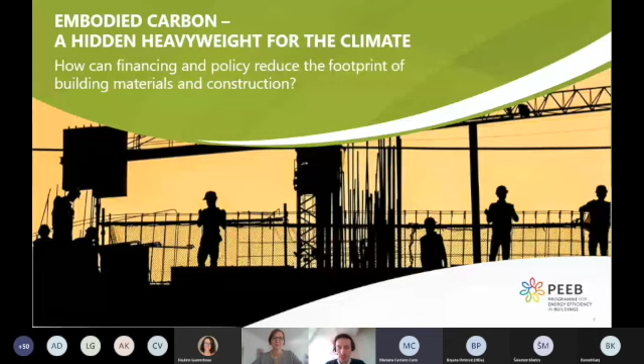This presentation is a summary of our understanding of embodied carbon and how it can be addressed. We will look at it from two angles: first, from a building project angle, what are the strategies to reduce our need for additional resources? And then we will look at the major culprits themselves, meaning building materials.

Just a quick reminder of the scale of the stakes here. As Anna mentioned, the size of Paris is added every week to the global building floor area. This represents a doubling of the global building floor area by 2060. Most of this growth is happening in Africa, China, and India.

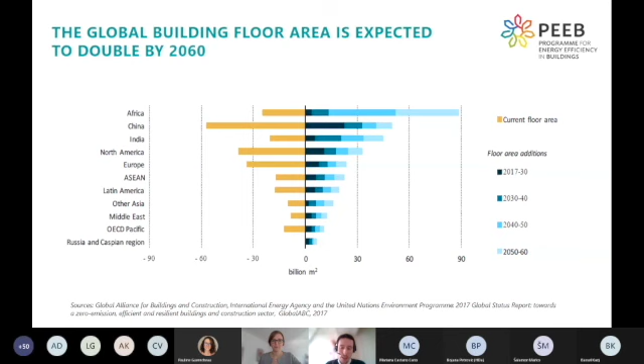Currently, buildings and construction represent 40% of global energy-related greenhouse gas emissions, of which roughly a quarter is so-called embodied carbon. Embodied carbon is essentially the emissions that were released before we even made use of a building. They mostly come from the provision of building materials and from construction activities, and they represent about 10% of global energy-related greenhouse gas emissions.

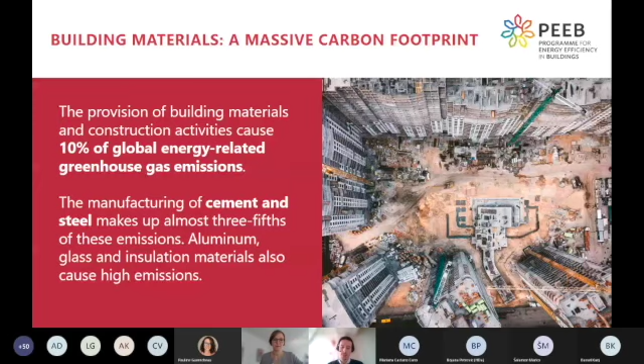The lion's share of these emissions come from the manufacturing of cement and steel, which are very energy-intensive processes, and to a lesser extent from aluminium and glass, which are less used but still very high emitters. Another important fact is that the relative weight of embodied carbon will increase as our buildings become more energy efficient. This means that if we want to keep decarbonizing the building sector, we have to look at embodied carbon just as much as we currently look at energy efficiency.

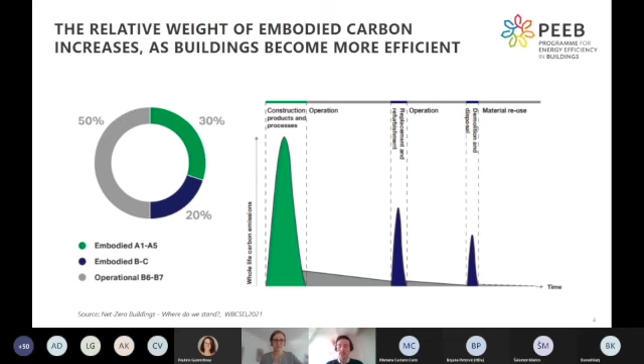Another important thing to notice on this diagram is how concentrated in time embodied carbon is added to the total carbon footprint of a building. This means we have to rethink the way we make our buildings, because there's no way to remove or reduce embodied emissions once they have occurred. So we have to keep them in mind from the earliest decision stages onwards, because afterwards the potential for limiting them reduces rapidly.

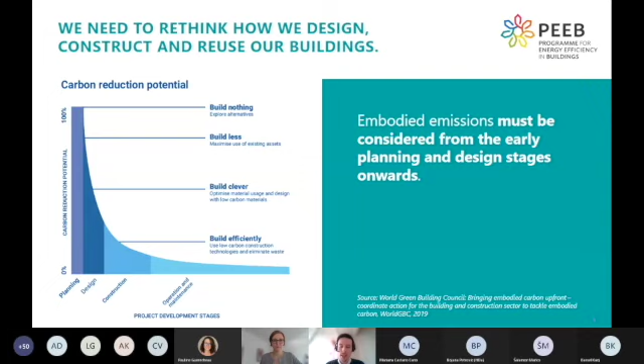So the first stage that is important is the planning stage. It's often overlooked, but it is important because this is when we decide how much and where we want to build, and this can have massive consequences on the amount of resources we need.

Simple decisions can be to favor retrofitting existing assets over constructing new ones. This is exemplified by this beautiful former water tower that was turned into a student house in Denmark. What can also be done is to go for more compact urban spaces, to densify and favor mixed-use planning in order to decrease our need for additional transport infrastructure.

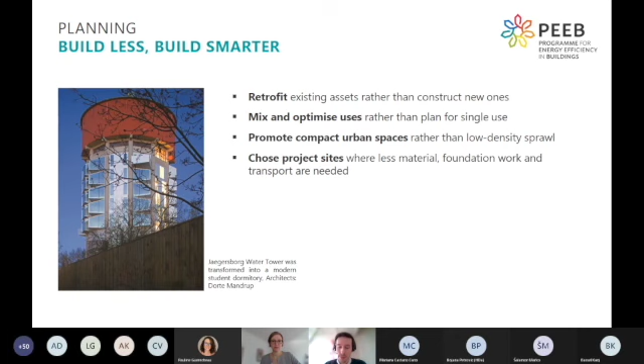A central stage is, of course, the design phase, because the choices we make in terms of architectural shape and materials will have a massive impact, not only on embodied carbon, but also on operational carbon, thermal performance, climate resilience, and adaptability. The decisions made at this stage have a massive impact on the behavior and performance of the building over its entire lifetime and its need for additional resources at later stages.

So what we encourage, in order to understand these interdependencies between embodied carbon and operational carbon, is to take, when possible, a whole life cycle approach in order to better inform design choices.

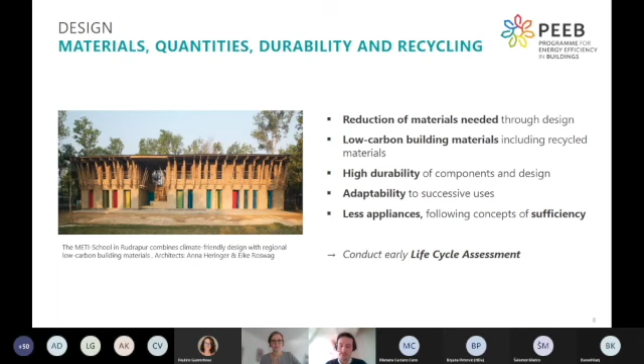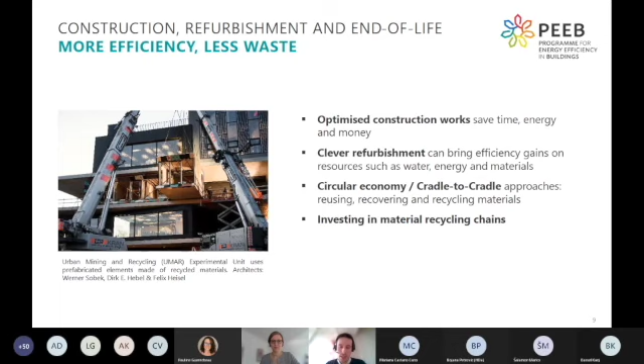Let's look at the elephant in the room: the building materials themselves, because no matter how resource efficient we become, we'll still need a massive amount of materials to address our growing need for buildings.

There are two schools of thought we hear in general: one is more focused on decarbonizing existing industries, and the other is more focused on developing alternatives to conventional building materials. What we understand at PEEB is that it's absolutely essential to do both at the same time, simply because there's no way around using concrete and steel, but there's potential to replace conventional materials in certain situations with more locally relevant and less carbon-intensive alternatives.

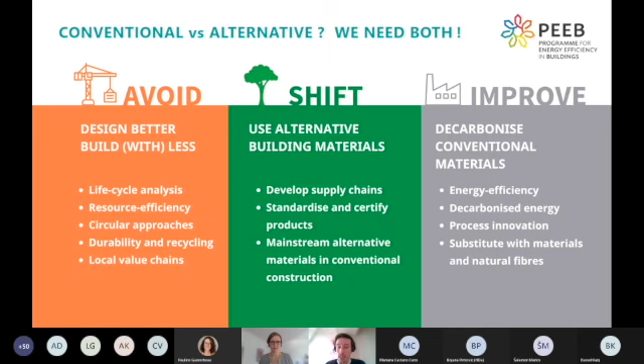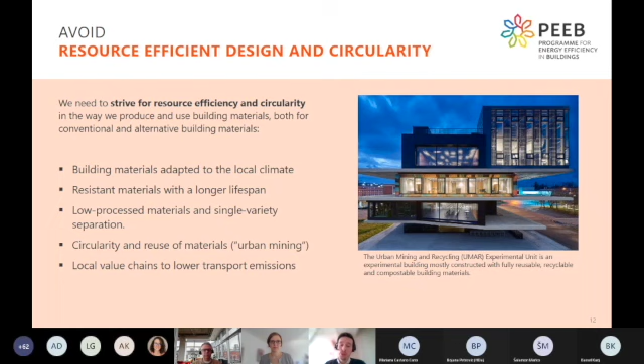So the first pillar of this approach, avoid, is basically what we looked at previously. It's about the design, the planning, the refurbishment and the waste management choices that we can make in order to reduce our need for additional resources.

Shift is about looking into alternative building materials that can be local and renewable, either bio-based like wood, bamboo, or natural fibers such as canes, hemp, and so on. It can be geo-based like clay and earth, and we can also include recycled materials in this category. These solutions are very context-specific, but if used in the right way, they can massively decrease embodied carbon. They can also support local and circular economies, and they feature excellent mechanical and thermal properties that can increase the resilience of buildings in the right context.

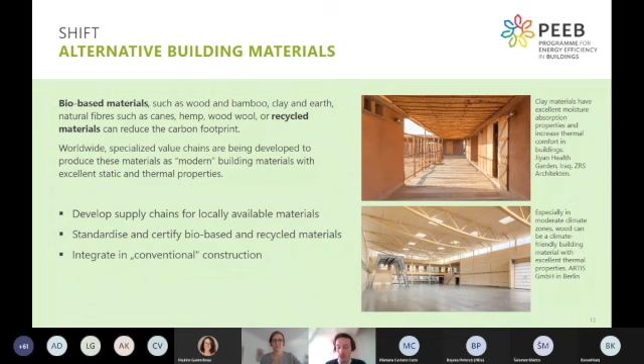The difficulty, however, is to get these alternative solutions to a meaningful scale in the face of the challenge of embodied carbon at a global scale. For that, we need to focus on developing local and circular value chains. We need to make these alternative solutions competitive by accelerating their standardization and certification, and we also have to work on how to better integrate them into our conventional construction techniques.

Finally, what we have to do is improve conventional materials. There's simply no way around the decarbonization of steel, cement, aluminium, glass, and so on. This is currently partly done already by decarbonizing the energy supply with the use of renewable energy. But there's also potential to invest in energy efficiency all along the very intensive production process, and there's potential to invest in innovation in regards to the chemical processes themselves, and in regard to substitute components that can be recycled or bio-based in order to reduce the carbon footprint of conventional materials.

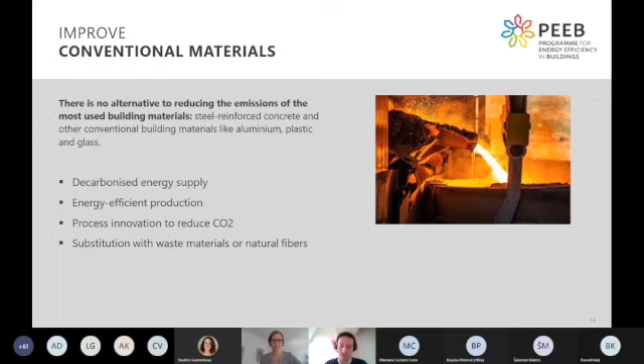So these are the main strategies that we have identified, and of course, the central question for PEEB is how policy, financing, and capacity building can support these strategies in order to reduce embodied carbon. So here's a quick overview of a few first thoughts we've had on this question in PEEB for policy, financing, and capacity building.

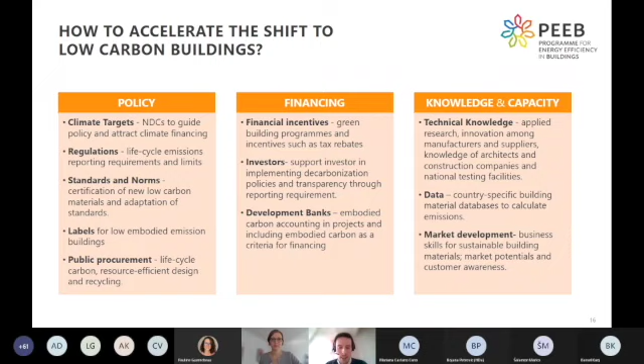I think I'm a little bit over time already, so I won't go into details now, but we can come back to this slide, because we would be really interested to discuss these options with you and our panelists. Before I hand over to our panelists, let me just quickly mention that you can find more details and all our references in our working paper on our website, and you'll also find other reports around the decarbonization of the building sector. Thanks for your attention, and I'm very excited to hear your insights.

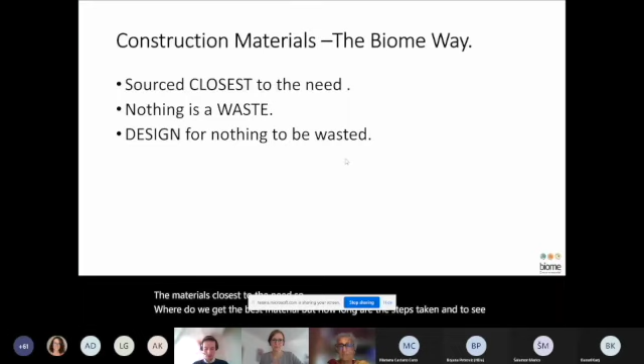So what does Biome do? We source the materials closest to the need. So where do we get the best material, but how long a distance does it have to be taken? And we see nothing as waste, designing in such a way that nothing is wasted.

Closest to the need - so this is our house, we call it Sanssouci, without problems. So it's the basement. The basement is a space which is 22 degrees throughout the year, so the best place to be in the summer and also in the winter of Bangalore. And that's where we get the earth from to build everything above, plus also we get the earth for the terrace, we call it our rice field.

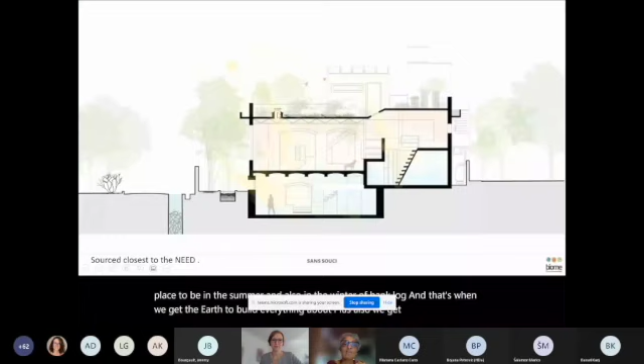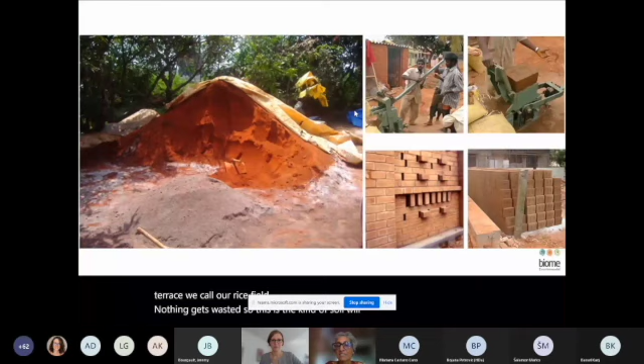Nothing gets wasted. This is the kind of soil we get in Bangalore, though soil is very versatile. This is the lovable soil, which is in fact made into blocks, and these are sun-cured. It's all with human energy.

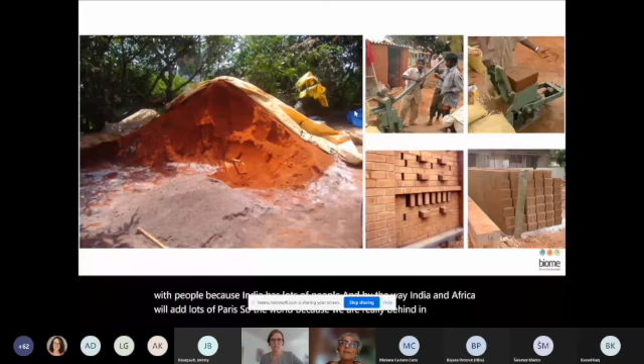We prefer to talk about working with people because India has lots of people. India and Africa will add lots of buildings throughout the world because we are really behind in infrastructure and the need is there. This gives the calories to the people rather than using machines, so the pollution quotient is very low.

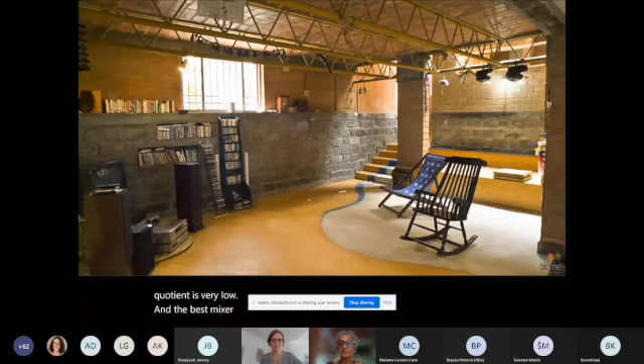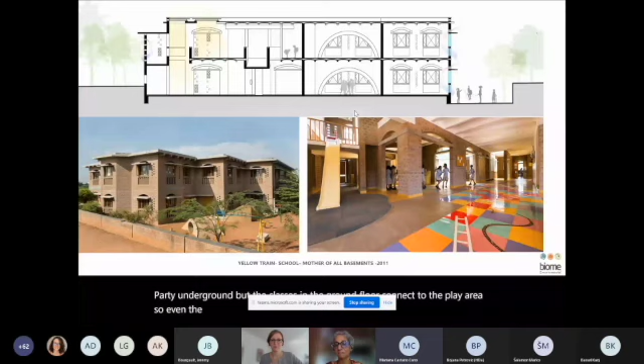And the basements are really great places to be in. But then, is it only homes? This is a school which we dug partly underground, but the classes on the ground floor connect to the play area, so even the play area is dug underground. We get lots of earth to make this whole 1,500 square meter school, plus also for future uses.

Then this is about 8,000 square feet, 800 square meters of office space, where you can see at the bottom here is a basement. We've cut it, we've taken the earth, we even made the wall of the basement and cut around it so that it doesn't get wet, and used the whole thing for building above.

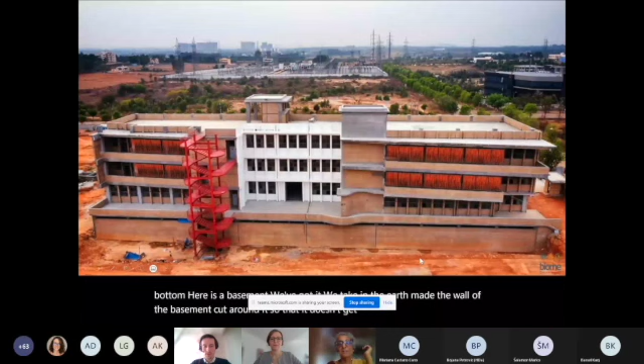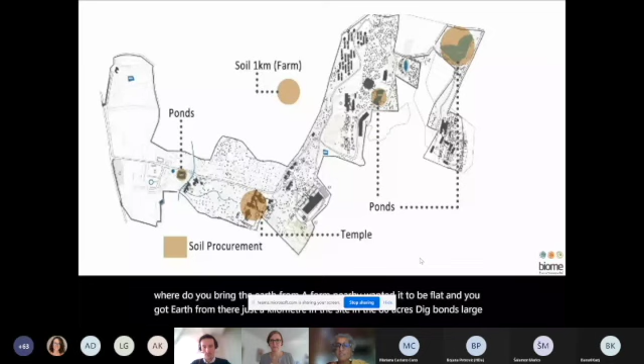Then it's a larger development in 80 acres of land. And here you start wondering, where do you bring the earth from? A farm nearby wanted it to be flattened, so you got earth from there, just a kilometer away. In the site, in the 80 acres, there are big ponds, large ponds of 100 square meters, so you could pick that earth. Different places you design to give you the volume of soil to make your buildings with.

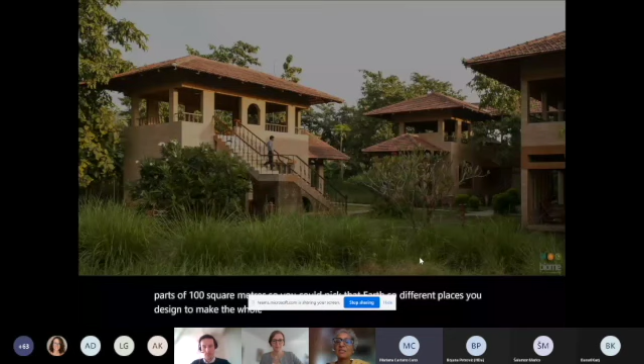So these are buildings, photograph taken after 13 years, designed according to the region. This is a place where it rains 4,500 mm a year, so you need to work at the roof so that the walls are safe from water ingress.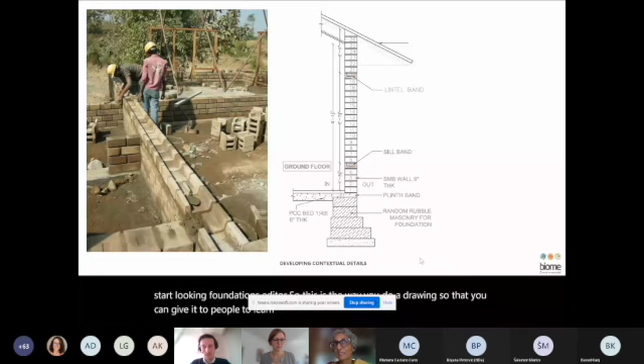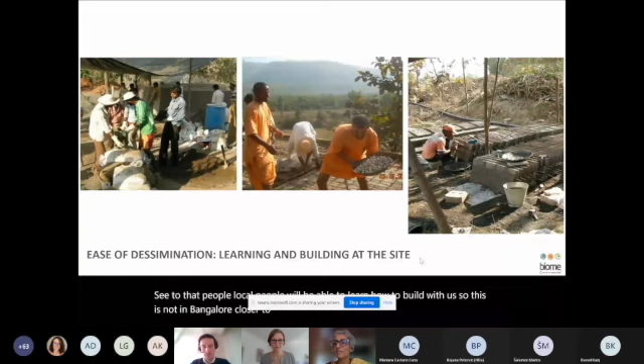How do you make dissemination happen? How do you see to it that local people will be able to learn how to build with earth? So this is not in Bangalore, it's closer to Mumbai, in a village. They're making the blocks, they're making the roofs. And this is in Nigeria, again, blocks and walls done, and this group has started now making a lot of buildings with earth blocks.

The machines went from India, and we trained them - my colleague Sheel trained them - and afterwards, for the past 12 years, they're making a lot of buildings. So this is also important for us: the systems have to be simpler to adapt.

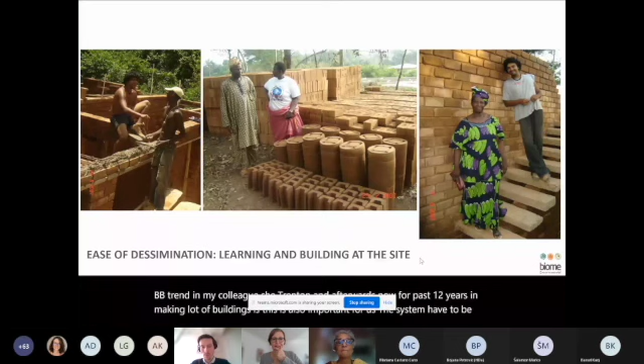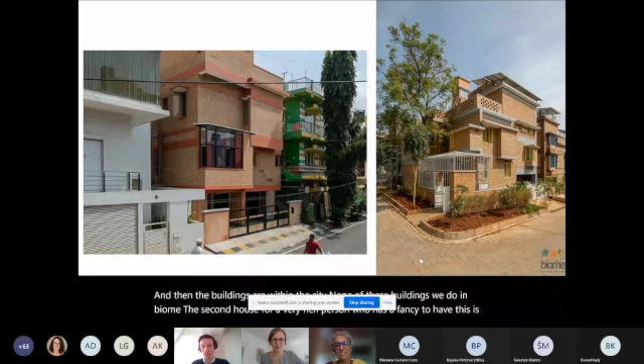And then the buildings are just within the city. None of these buildings we do in Biome are the second house for a very rich person who has a fancy to have an earth house. This is right in the middle of the city, a middle class home. And on the right, you see two friends having their own homes.

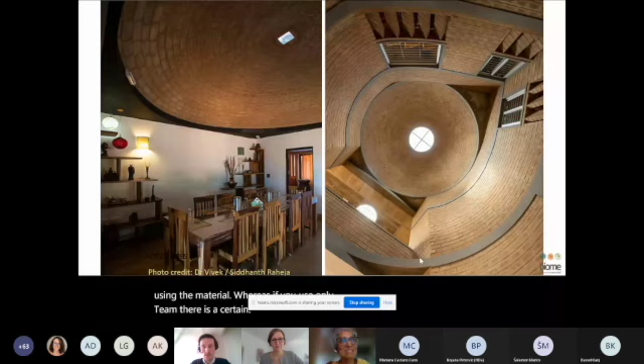It's such a beautiful material that it doesn't leave you only making plain, simple walls. You can really craft, and craft is important because the aha moment has to come. There's various ways of using the material, whereas if you use only steel, it gets binding. The concrete, you have to make it straight. But here, there's much more possibility without giving up on the creativity.

In a small plot where we couldn't make the blocks at the site, we used rammed earth. Looking within the city, this is rammed earth - every day you bring a certain amount of soil, ram it, and let the walls go up.

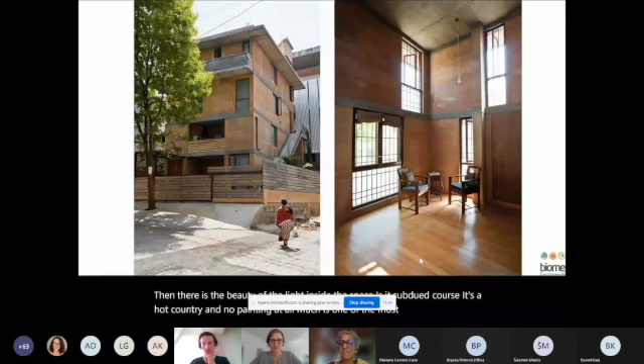And then there is the beauty of the light inside these spaces, which is subdued because it's a hot country. And no painting at all, which is one of the most polluting elements of construction. Then, like what I said, nothing goes as waste - buildings become waste sinks, they embody the waste which otherwise people have thrown around.

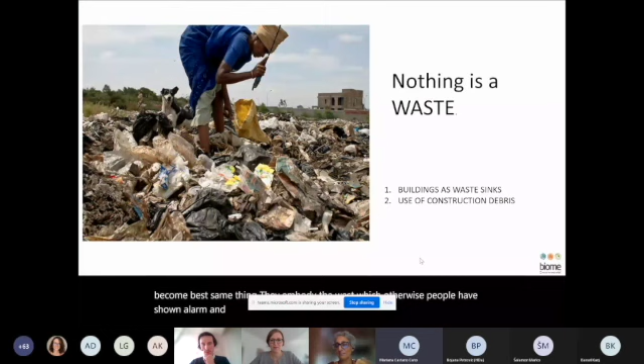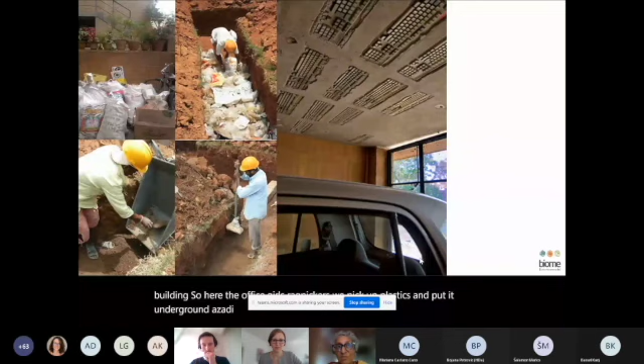Using construction debris into the making of the building. Here, the office uses rag pickers. We pick up plastics and put them underground as a DPC layer. Note that most of these places have a very low water table, so there's no way the plastic is going to leach at all.

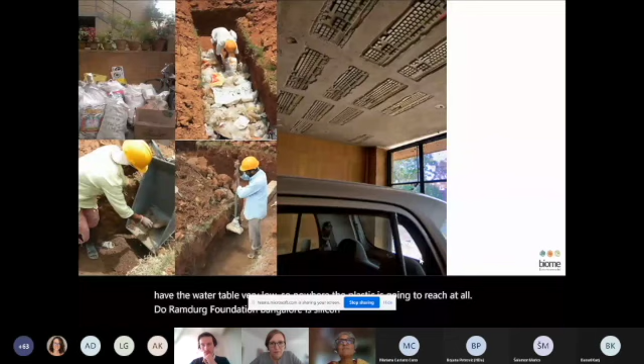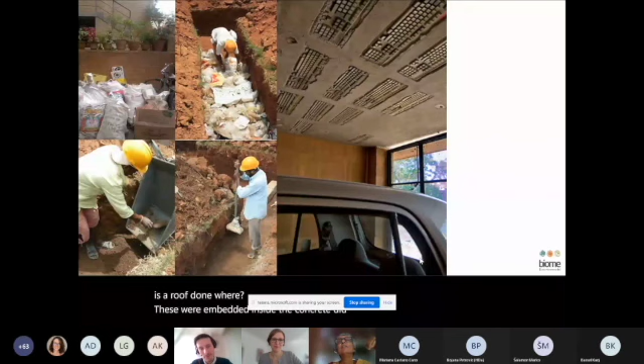And we do a rammed earth foundation. Bangalore is the silicon city of India, and this is a roof where keyboards were embedded inside the concrete to reduce the amount of concrete used, using construction waste when we didn't have policies for recycling electronic waste.

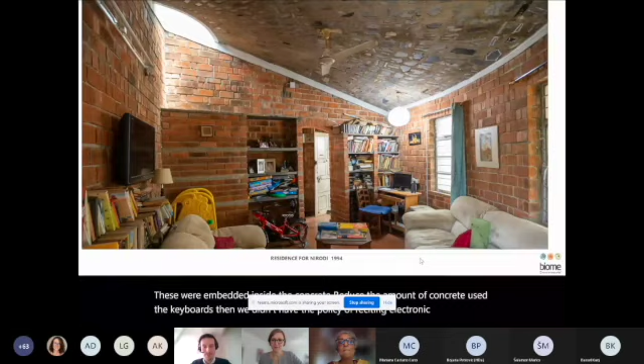So there's stone cut, again used on the roof itself. Here is the shop of a recycler where he had a lot of louvers. Those louvers were used in this building as a screen to reduce heat ingress into the corner where paper was stored.

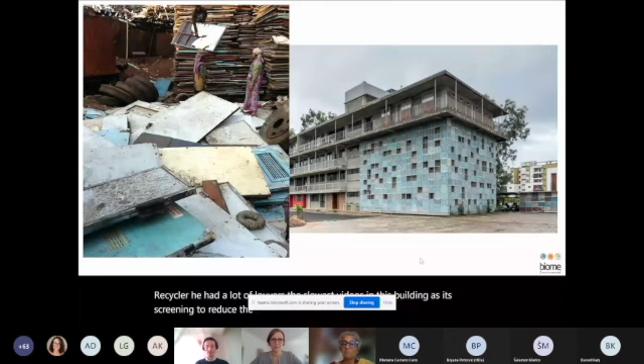Now our cities are changing. The city bylaws change, the way of using the land changes, and old buildings come down. Can we reuse the old building itself, the material? On the left is a building 80 years old, which we pulled down and made the new building on the right. While we included earth blocks, most of the material was reused.

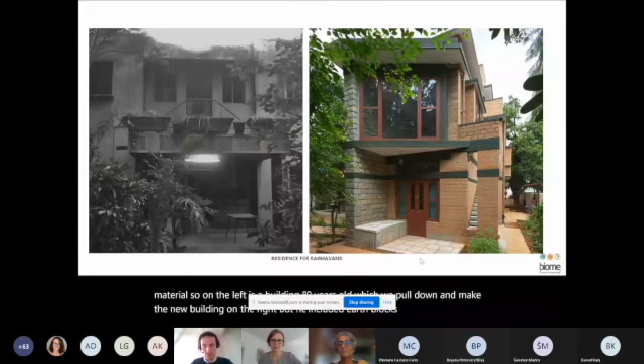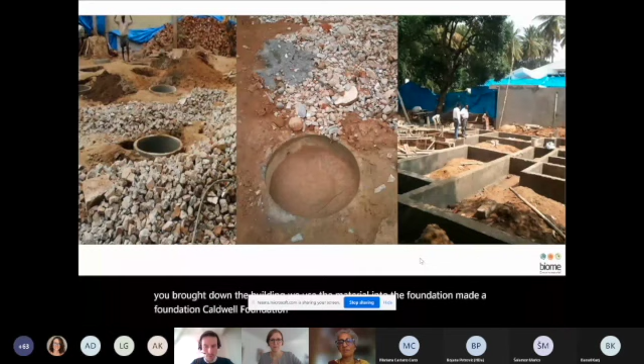You see the stone was earlier in the building on the right. When we brought down the building, we used the material in the foundation, made a foundation called a well foundation, put all the material there—so not a conventional foundation—did a grade beam, and the rest of the building comes up, without cutting trees, without hindering any of the work around, and without taking our waste, usually in Bangalore, to a lake.

In fact, this building now accommodates more people than earlier—3 families rather than just 3 people earlier. And also now to look at how you design that into the very design itself, so that there will be no waste.

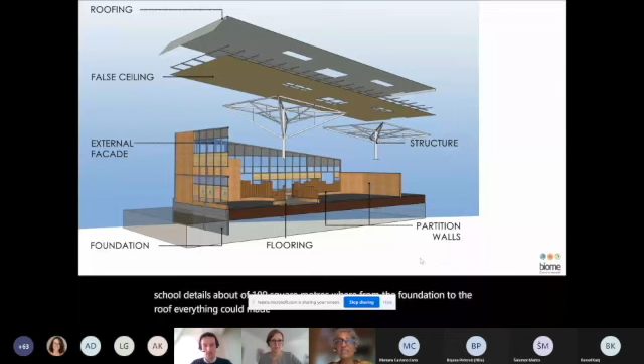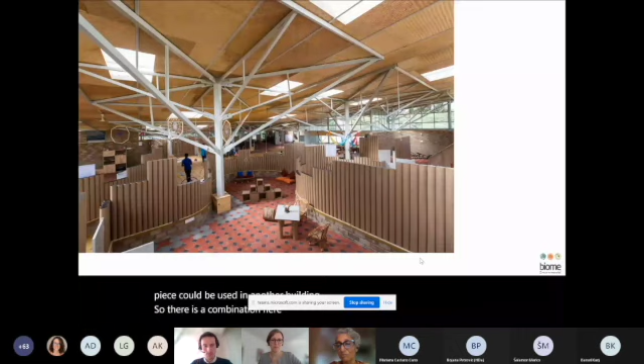This is the structure of a school we did, about 100 square meters, where from the foundation to the roof, everything could be reused, either as the complete same building or every piece could be reused in another building. So there's a combination here. We've improved, like Paul said, on the columns—the columns are of steel, but very minimal, only where needed.

And they are all bolted, so you could open up everything and nothing would go to waste. The walls are of paper, so it will be composted, cradle to cradle. The floor is of tiles which could be removed because they're not jointed by cement, they're based on quarry dust. So you could remove the flooring, you could remove every piece of this building and put it elsewhere too.

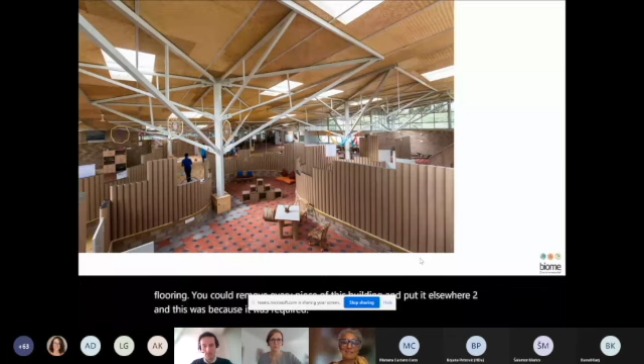And this was required by the project itself—the land was only available for 5 years. That's the building here, and that's it. Thank you. Am I less than 10 minutes? But I hope somebody else uses this. Thank you very much.

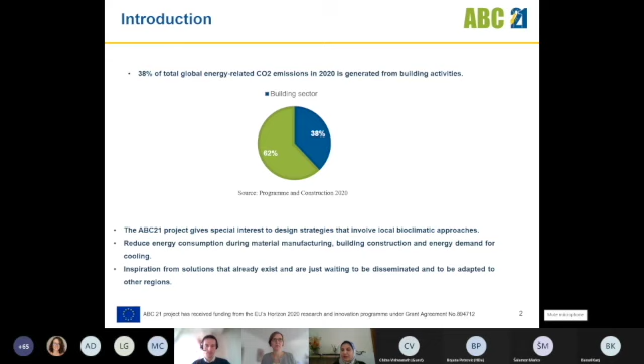This project is a huge project. There is plenty of information that should be gathered, and there are partners from Europe and Africa, many institutions. Our goal or task in this project is to focus on materials, specifically bioclimatic materials.

The first reports that we published, which you can also find in our ABC21 communications, gather all information on active organizations and active manufacturers that produce local bioclimatic materials and constructions.

We gathered all the information in a table. You can find the country, the company, the contact, even all kinds of contacts for this company, like the website and so on, their activities, and examples of their projects and achievements.

This will facilitate things for everyone who wants to do this kind of activity, to contact these manufacturers, because there are plenty of them, but they are scattered and not really correlating.

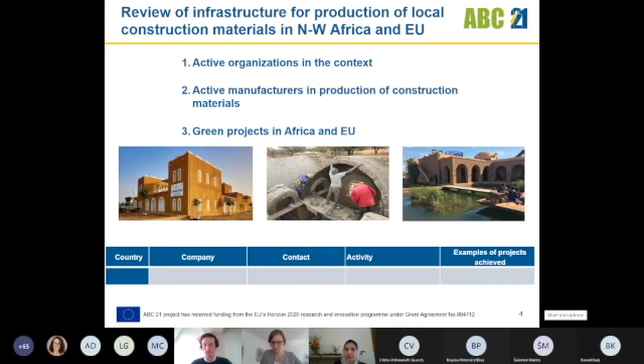In the other reports, since we are scientists, I am actively working on research related to bioclimatic materials. So it was interesting for us to look for different types of bioclimatic materials, because I actually work in my group only on clay products with additives and bricks. Here I was exposed to a more interesting and varied range of bioclimatic materials.

As you can see, the spectrum of these materials is very broad and very large. We tried to gather them into groups and main basic products, because you can find formulations that include these products at different proportions. But at least here you find the main products used in bioclimatic constructions.

We can cite earth-based constructions like adobe and clay brick with additives, rammed earth, earth bag constructions. You can also find widely used stone constructions, cork-based bricks that can be used for construction as well as insulation, hempcrete, straw bale constructions, thatched roofs, typha-based bricks, wood, bamboo, and wool.

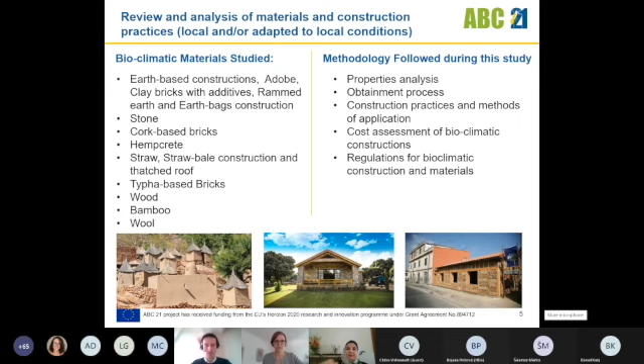So here I can show you some nice examples of earth-based constructions. You can see the adobe, which is mainly made from clay with some natural additives like fibers, such as straw, and water. They are mainly dried in nature. These kinds of blocks will be used in constructions, and you can even use them, as you can see in the Nubian vault technique, where they are used with arcs. So you don't even need any other stuff to improve their stability.

You can find also the rammed earth. They can give us very nice and beautiful kinds of constructions. These are modern constructions using the rammed earth.

You can see the earth bag construction. There are plenty of varieties of them. They are easy to use, and they mainly use local materials. They don't have any specific need for materials. They can have some proportion of clay to soil, and then you have additional additives like some lime to improve the stability. Then you can do the construction. Mainly dome construction is also used for this kind of earth bag construction.

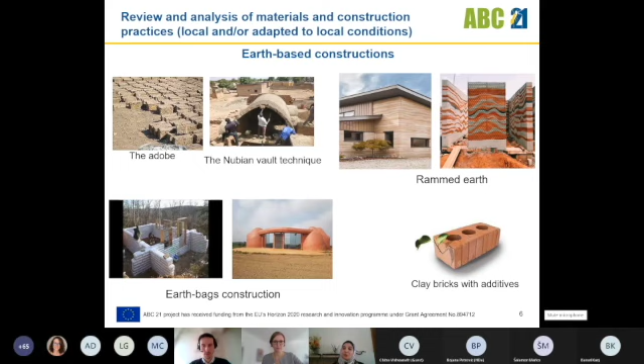But using several types of additives, you can find that with some specific additive, we can have very good results, meaning we improve both the mechanical properties and the thermal properties. So this is like the key. We're doing several research studies on several types of fibers, and mainly for fibers at low concentration, you can have both improvements in thermal properties and mechanical properties. When you increase it, you get a decrease in the mechanical properties.

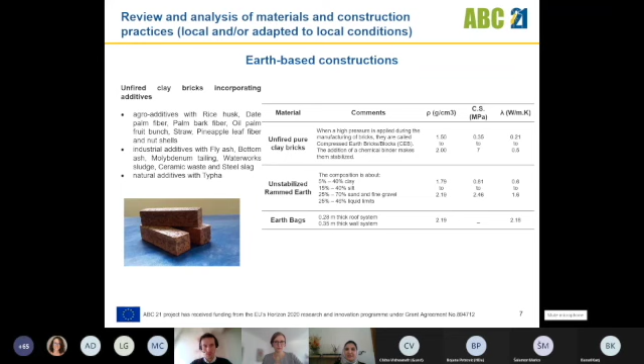So we can see, depending on the type of construction, using the same clay, for example, for earth bags, you have some conductivities that are quite high compared to the unfired clay bricks or unstabilized rammed earth. This is, of course, just a comparative study that I will show you at the end, because I see that the time is quite short.

I will also speak about the organic residue-based blocks. You can see here that we can have very interesting types of materials. If we have supports, for example a wooden support, you can even build with this kind of material, and you can see that their thermal conductivity is very interesting, mainly for the Typha. Typha has very, very interesting properties, and you can use several parts of the Typha product, and you can have several types of products too, depending on the formulation.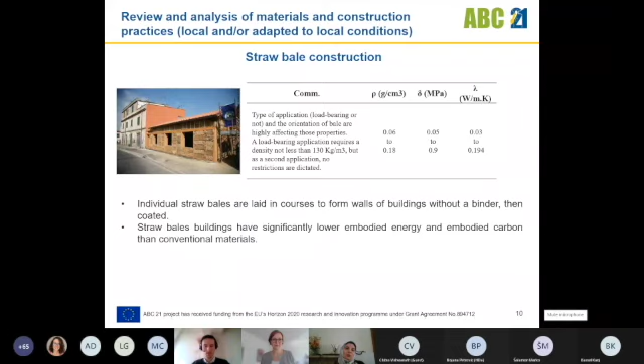There are also very interesting types of construction using straw, because straw is very abundant and also has very good thermal conductivity. This is just an example of a way of constructing with straw bales.

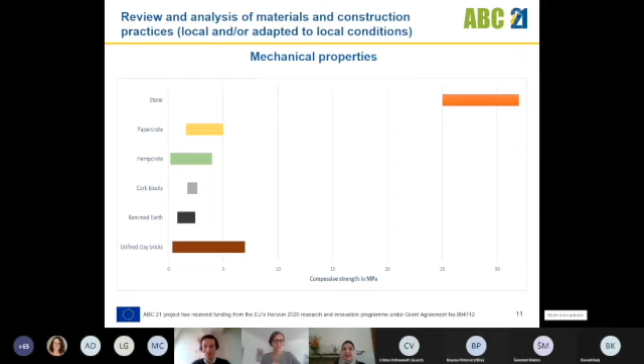So here I will show you a small summary of the properties. If I compare the stones to other types of constructions, obviously they have very good mechanical properties, followed by the unfired clay bricks. Depending on the formulation of the unfired clay bricks, you can raise their compressive strength to very interesting values. For the others, they can be used but by other supports, but also used as insulation materials and secondary layers.

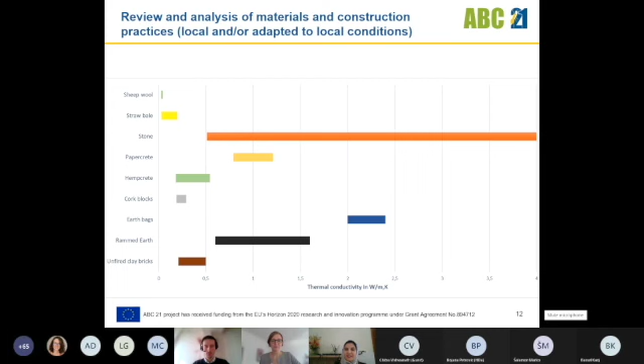insulation should be done in this kind of constructions. For earth, of course, for stone construction, you can see that we can have very nice mechanical and thermal properties. Okay, with that, I just gave you a summary mainly on the properties, the mechanical and the thermal properties, the most important properties for constructions, and I'm open to any other questions if you have. And thank you very much.

Perfect. So thank you very much for that very impressive presentation. I can already warn you for the discussion later that there are a lot of questions, a lot of them also around getting this to scale. So I think you have a bit of time to think about it before we move into the discussion. And now I would actually like to invite the last piece of the puzzle, but a very important one, of course. The question of how do we address, well, basically, you know, the main materials that we're using, especially concrete, steel, etc. And we have two presenters for this, and I hear a little echo, but I think it's fine. Yes, so we have two presenters, because I think it's a big chunk that they want to attack, so we have two, which is very good.

So we have Marlène Dresch from the ACT Initiative, and we have Anupam Badola. Marlène is an engineer and environmental scientist, and also has a PhD with more than 20 years of experience in that field. She will start off basically giving the frame of how to work with companies on the topic, and then we'll hear from a company themselves. Like what's your role in this, what's your, you know, it's not an easy one, but how do you attack it? And we have an excellent speaker for this. We have Anupam Badola. He is actually also, I learned, a sustainability professional. He started out with a degree in environmental studies as well. So he has 16 years of experience in the heavy industry, in cement. He works at Dalmia Cement, which was founded in 1939, I learned, and manufactures 36 million tons per year, and they have 14 cement plants spread across India. We also researched that the company has the lowest carbon footprint in the cement world globally. We could not verify this, but we're very excited to hear from you about your work, and basically what takeaways we could take from that.

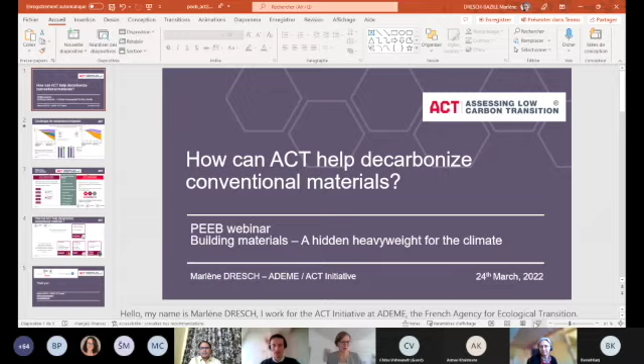Without much further ado, I think, Marlène, we see your presentation. If you could just put it in presentation mode, I think that we're good to go. The floor is yours. Is that all right? Perfect.

Thank you for the invitation. Hello, everybody. My name is Marlène Dresch. I work for the ACT Initiative at ADEME, the French Agency for Ecological Transition. Today I'm here to talk about how ACT can help decarbonize conventional materials such as cement and steel. First, I would like to give an insight into the challenges that conventional material producers will have to meet to contribute to the Paris Agreement mitigation goal. So let's have a look at charts coming from the International Energy Agency.

The first one is about the iron and steel sector. These charts represent the global CO2 emissions for this sector from 2019 to 2050 and even beyond. If we go on business as usual, we will follow the upper curve, and that is not at all aligned with the Paris Agreement goal. The lowest curve, called SDS for a sustainable development scenario, is aligned with the Paris Agreement goal and will require huge changes in the sector to achieve a 54% reduction in absolute emissions until 2050.

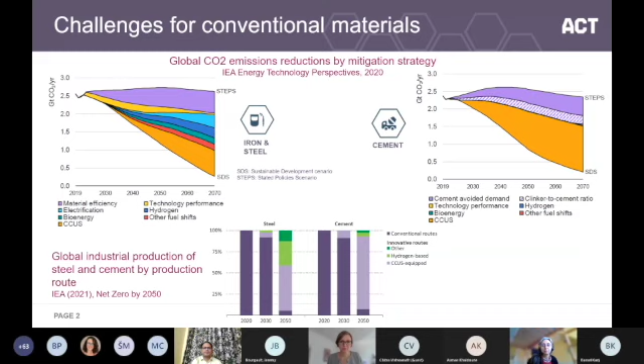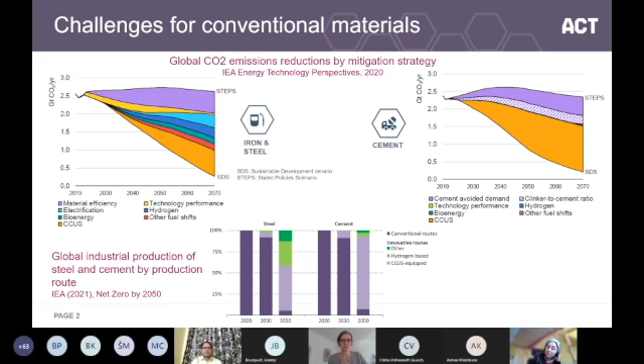The second decarbonization lever is to lower the clinker to cement ratio, and also CCUS. To illustrate that the changes are huge, the last chart shows for cement and iron and steel sectors what the route of production would be in 2030 and 2050. As you can see for both sectors, the conventional routes, shown in dark purple, are mainstream in 2020, while in 2050 the innovative routes, shown in light purple and green, would be dominant. Since these sectors have long life plants, decision-making now will shape what the sectors look like in 2050. So it's urgent that this sector start the low carbon transition right now and define a clear transition plan aligned with the Paris Agreement goal.

This is where ACT can help. ACT stands for Assessing Low Carbon Transition. It's a joint voluntary initiative at global level, co-founded by ADEME and CDP, focused precisely on companies' low carbon strategy. So what does ACT provide? On one hand, we provide a methodology and a set of tools to help companies develop and implement a low carbon strategy and the associated action plan — what we call ACT step by step. On the other hand, we provide sectoral methodology to assess the alignment of a company's low carbon strategy with the Paris Agreement goal.

We have one methodology for cement, one for iron and steel, and also one for building. We take a future-oriented and holistic approach, which analyzes a company's strategy against qualitative and quantitative indicators, considering different aspects of the strategy: targets, investment in plants and R&D, carbon performance of sold products, and more qualitative aspects such as how the company involves the value chain in the process, and how the business model of the company is shifting to stay profitable in a low carbon economy.

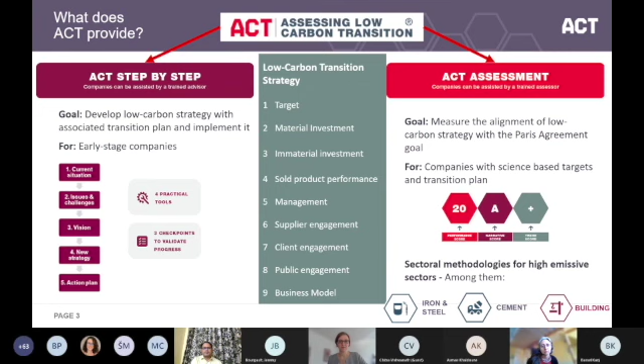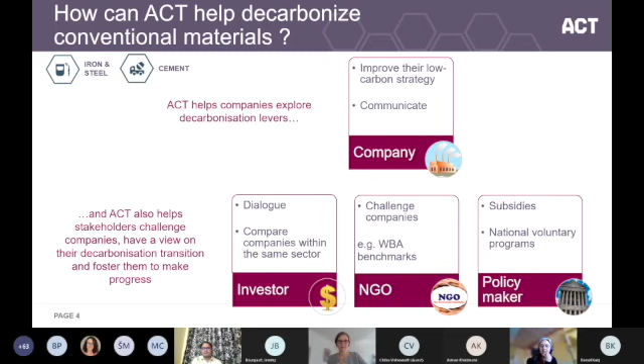Finally, how can ACT help decarbonize conventional materials? ACT helps companies understand their readiness to transition to a low carbon economy and also identify opportunities for improvement. ACT can also help stakeholders challenge companies and establish dialogue, whether the stakeholder is an investor, an NGO, or a policymaker. So thank you very much for your attention. I just wanted to wrap up by saying that companies producing cement, iron and steel, and also aluminium, etc., must take action now and establish a low carbon strategy aligned with the Paris Agreement. So ACT provides tools to help and create accountability.